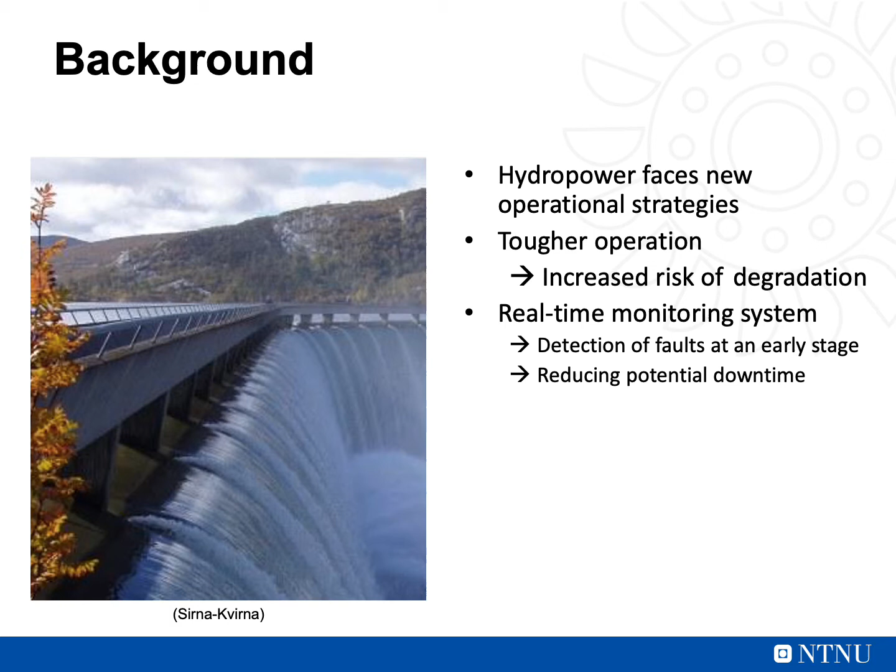In other words, the turbines are forced to handle tougher operation and prone to more frequent degradation and damages. At the same time, there is an increased focus in the hydropower industry on developing models for fault detection and condition prediction. By implementing real-time monitoring systems including such models, a better understanding of degradation may contribute to detect faults at an early stage and reducing potential downtime.

I will introduce you to the main parts of my project thesis. First, I will give a brief review of methods used for fault detection in the hydropower industry to provide insight into state-of-the-art. Further, relevant theory and methods necessary to identify the normal behavior of a turbine will be presented. Steady-state measurements of pressure pulsations are conducted on the Francis model test rig in the Waterpower Laboratory. Peak-to-peak values and frequencies from the measurements are analyzed and related to various hydraulic phenomena, and possible fault detection schemes are suggested. And finally, I will talk a little bit about further work.

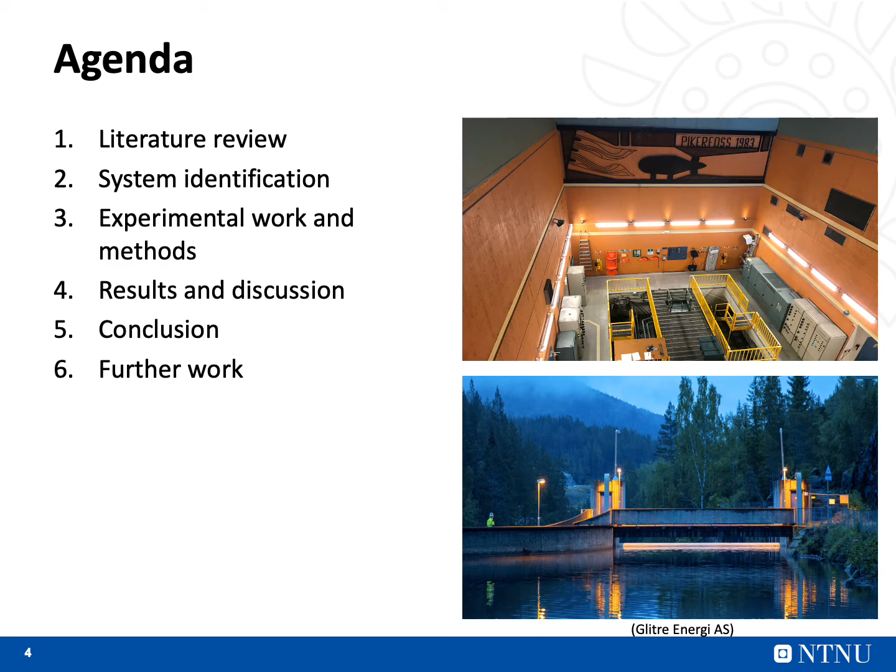I will not go into details from the literature review, but present some key findings that have helped form my project work during the autumn. When developing models used for fault detection, sufficient data from both normal and faulty states are essential. Hydropower components are characterized by unique designs, high reliability, and long lifetime, which results in a lack of historical fault data, so learning from faults is not feasible.

Findings from the literature show that this limitation is usually dealt with by building models based on the normal behavior of the system. Normal behavior models aim to learn the typical relations and patterns for the operation of the system without symptoms of failure. In this way, the real measured value from a sensor can be compared with the estimated value from the normal model, and a deviation will indicate an abnormal situation that should be further investigated. Such models can be divided into different categories, often classified as either physical or data-driven models.

Physical models depend on the knowledge about the process and the underlying physical phenomena that result in faults. They may be beneficial when detecting specific local faults in the system or at component level, such as detection of different cavitation processes on the runner blade. A study done by Xavier Escaler, a researcher from Spain, shows how to detect 4 cavitation processes on a Francis turbine. By first identifying the frequency signatures of each process from vibration and pressure analysis, he demonstrates how the amplitude of each frequency changes when provoking the different cavitation types. The result can be seen from the figure.

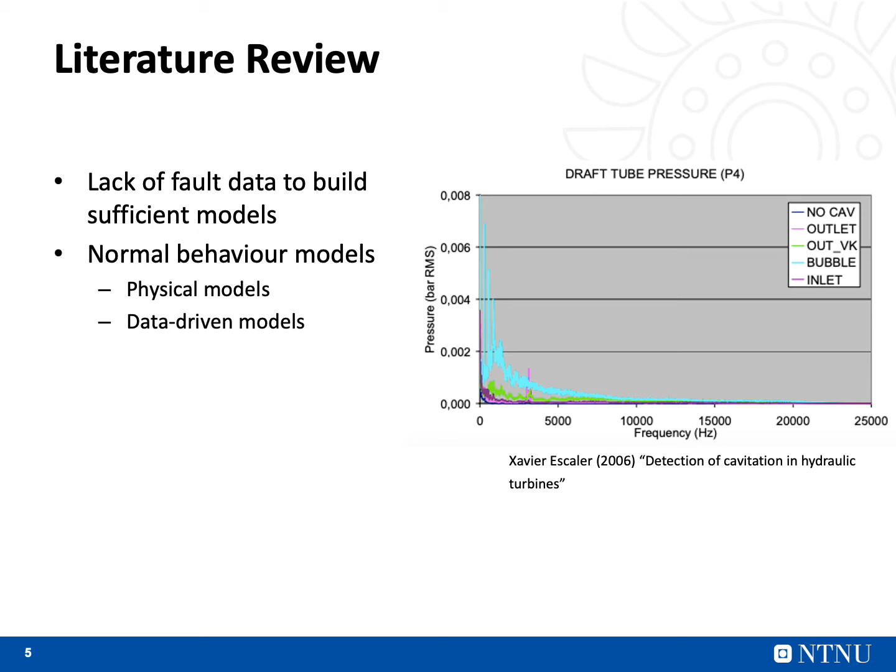Data-driven models, on the other hand, aim to find patterns in large datasets to identify unexpected trends and deviations. And due to the complex structure of a hydropower system with interacting components regarding mechanical, hydraulic and electrical equipment, the mapping between the different parameters may be challenging to describe with a physical model. Data-driven approaches allow for discovering non-linear dependencies in extensive datasets based on machine learning algorithms. These methods are not widespread in the hydropower industry today, but several attempts using artificial neural networks and support vector machines have shown successful results.

So, when building a normal behavior model, it is necessary to identify the system and the typical failure modes, which is necessary for finding out how these can be detected. Even though hydraulic turbines are reliable, they are subjected to some modes of failure.

According to the handbooks of EBL, standards used by Norwegian hydropower companies, the types of failure that occur on the runner blade can mainly be divided into crack propagation and regular wear. These damages are caused by material defects and fatigue, in addition to cavitation problems and sand erosion. And they are essentially a consequence of vibration due to pressure pulsations and hydraulic instabilities in the water flow.

These failure modes may not directly lead to breakdown. However, they may cause harmful and unstable operation, and if a turbine continues to operate under these conditions, the lifetime will be significantly reduced. Turbines are designed to operate at one operational point called the best efficiency point. The appearance and intensities of the phenomena tend to increase when running outside this desired point.

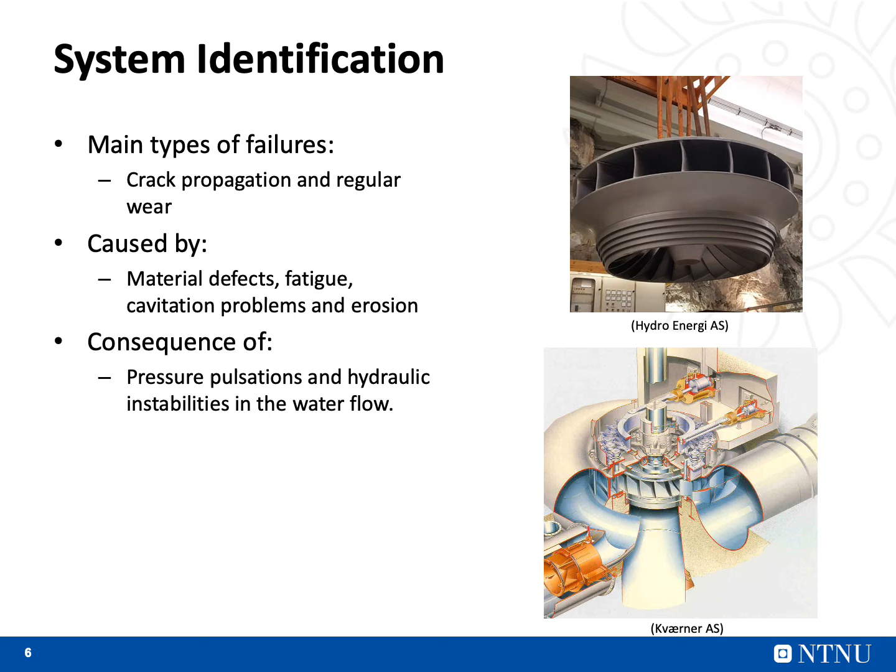So our first step is to identify the primary sources causing pressure pulsations. Pressure pulsations are flow phenomena that occur inside the turbine and can either be of stochastic or deterministic nature. A common source for deterministic pressure pulsations are the rotor-stator interaction and the part-load vortex rope in the draft tube.

The RSI refers to pulsations that occur as a result of the interaction between the rotational runner and the stationary part, as seen from the upper picture on the screen. The frequency of this pulsation will depend on the rotational frequency and the reference system, and seen from the guide vane, the frequency experienced each time the runner blade passes is called the blade passing frequency and can be found by multiplying the number of runner blades with the runner frequency.

Yes, and when a turbine operates outside its design point, a swirling component will occur in the draft tube. At part load, the swirling component will move in the same direction as the runner, and the rotating vortex rope can be observed, which you can see to the right on the lower picture. And this rotating rope will induce pulsations in the range of 1/3 of the runner rotating frequency.

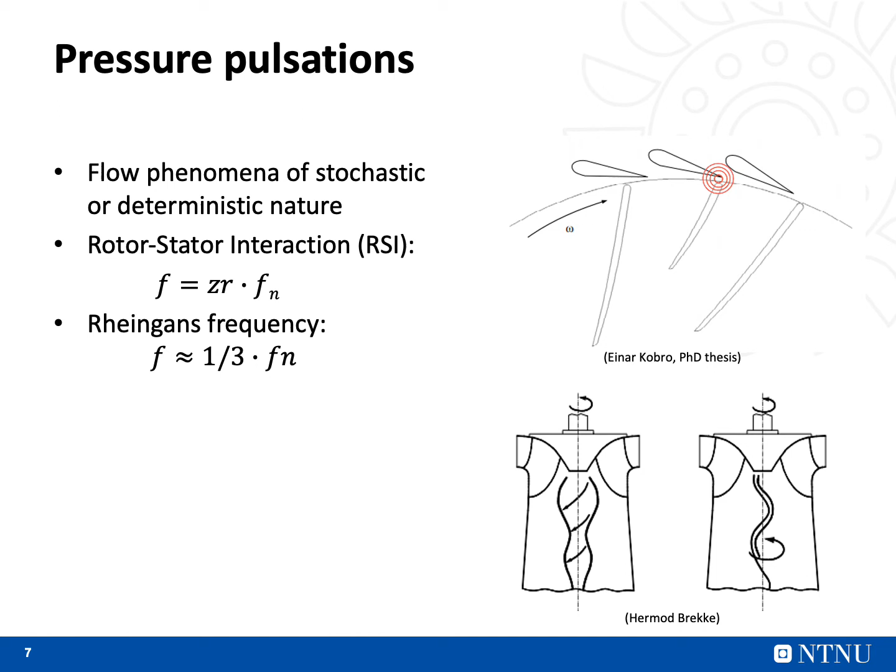So, the measurements in this project were conducted on the Francis Model Test Rig, located at the Water Power Laboratory at NTNU. Measurements were done for the open loop configuration at a constant head of about 12 meters. The figure shows an illustration of the open loop circuit. The water is pumped from the lower reservoir in the basement to the upper reservoir in the attic. And from there, the water flows through a high-pressure tank, through the turbine, the draft tube, and the draft tube tank into the lower reservoir again.

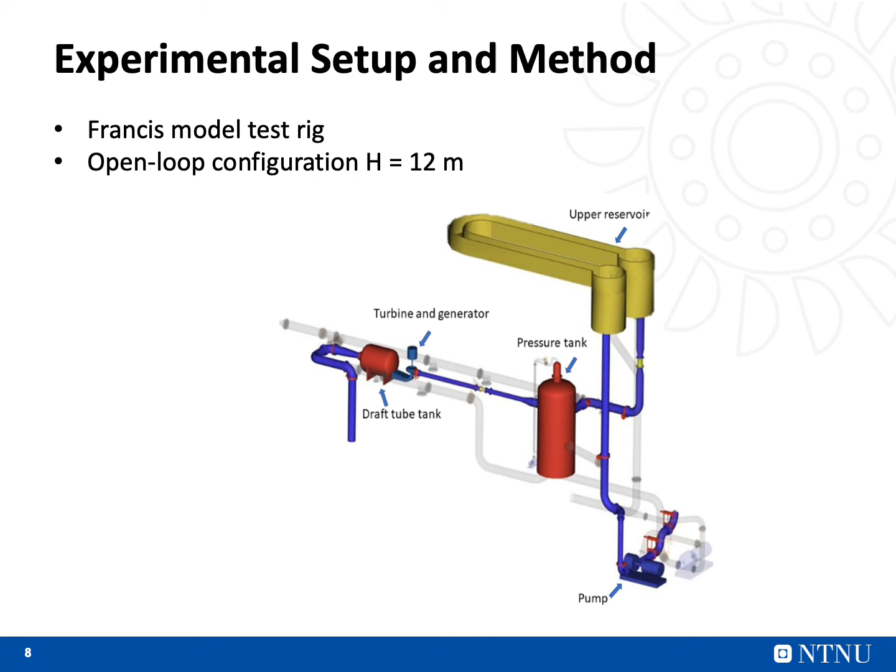And during the measurements, the pump turbine runner was installed, which consists of 6 runner blades, and the number of guide vanes is 28, and the spiral casing consists of 10 stay vanes. The pressure pulsations were measured by 3 pressure sensors. One was mounted at the inlet before the spiral casing, and 2 on the upper draft tube cone, 180 degrees from each other, as you can see from the figure.

The sampling frequency was set to 5,000 Hz to ensure reconstruction of all frequencies from the analog signal, and the recording time was 120 seconds. Steady-state measurements were carried out for guide vane openings from 4 degrees to 14 degrees at constant rotational speed. The speed was set according to the one obtained at BEP, the best efficiency point, to give a realistic picture of the actual working range for a full-scale turbine.

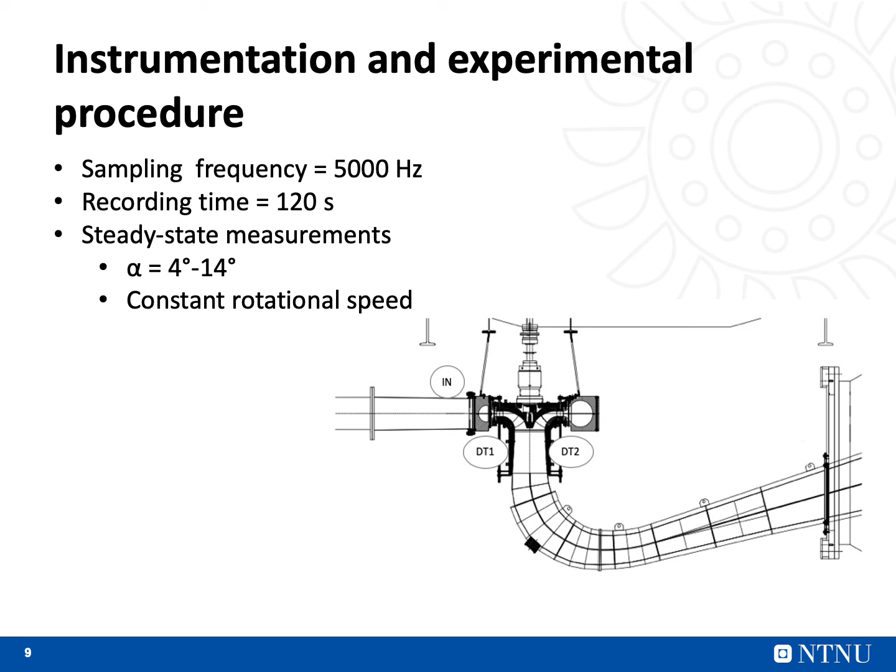As the system degrades, characteristics of the signal in time and frequency domain may change. MATLAB has been used for analyzing the measured data. Peak-to-peak values are calculated for each guide vane opening with the histogram method containing 97% of the sample signals. The peak-to-peak values give an impression of the intensities of the pulsation, but independent of the frequencies. So, to investigate the origin of these, the signals were decomposed.

A spectral analysis of the acquired pressure values was conducted using the Welch power method. The method returns the estimated power spectrum by dividing the sampled data into overlapping segments. Each block is then multiplied with a suitable window to remove discontinuity in the signal before the fast Fourier transform is applied. And finally, the resulting periodograms are averaged over all windows to reduce the variance. The spectral analysis was performed in MATLAB with a Hann window and 50% overlap, and 8 windows.

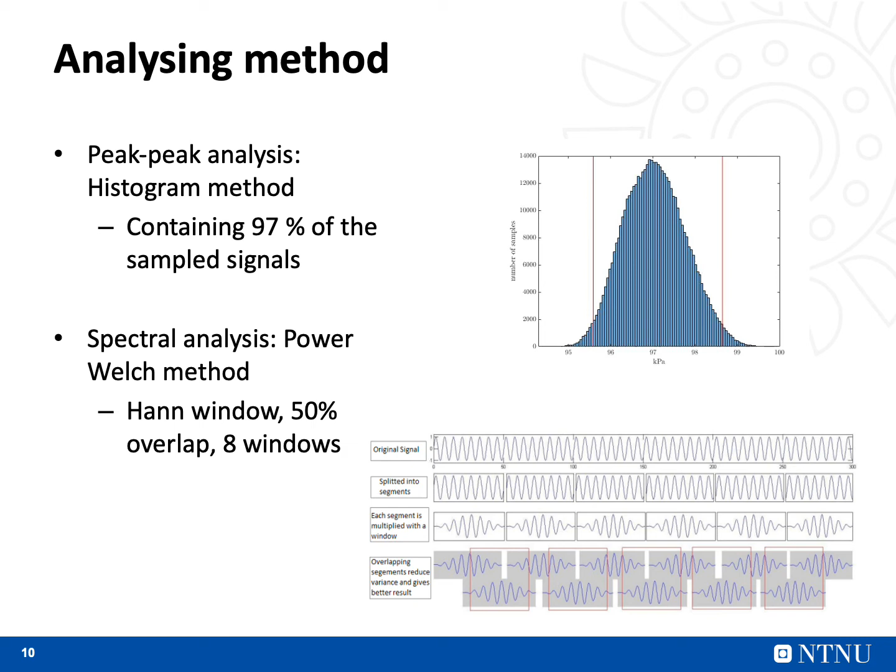So to the results and a discussion of these. The figure to the left shows how the relative peak-to-peak value varies with different guide vane angles for the 3 sensors. The pulsations have highest intensities at low and high loads away from BEP. Here the flow entering the draft tube is characterized by irregularities and swirling components, inducing pulsations with high amplitudes.

In addition, the peak-to-peak values for the inlet sensor increase from BEP towards overload, which can be explained by a smaller volume in the vaneless space, causing more pronounced pulsations with higher amplitudes. When a runner is damaged either through erosion or cracks, this will affect the water downstream the turbine and may increase the intensity of the pulsations in the draft tube.

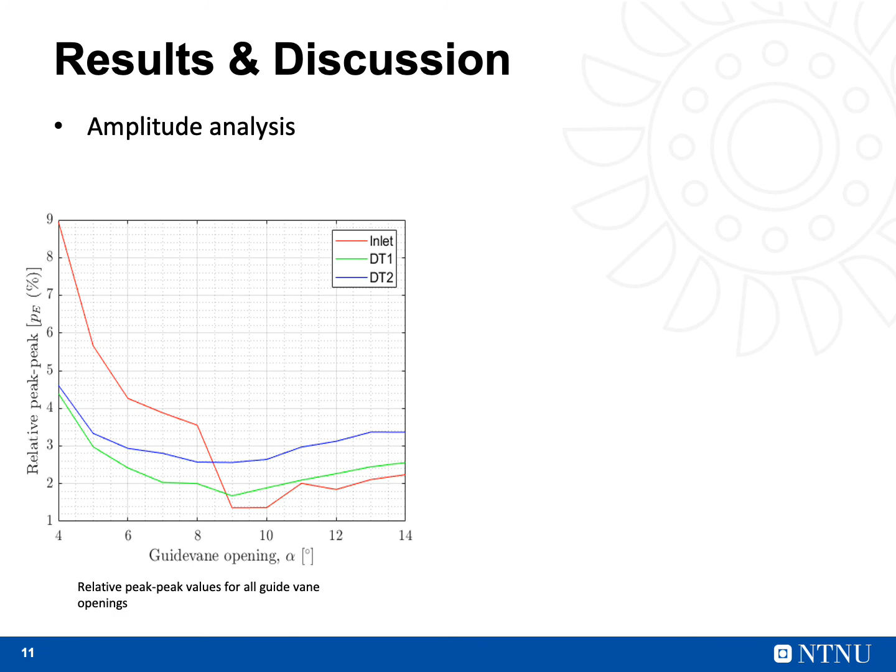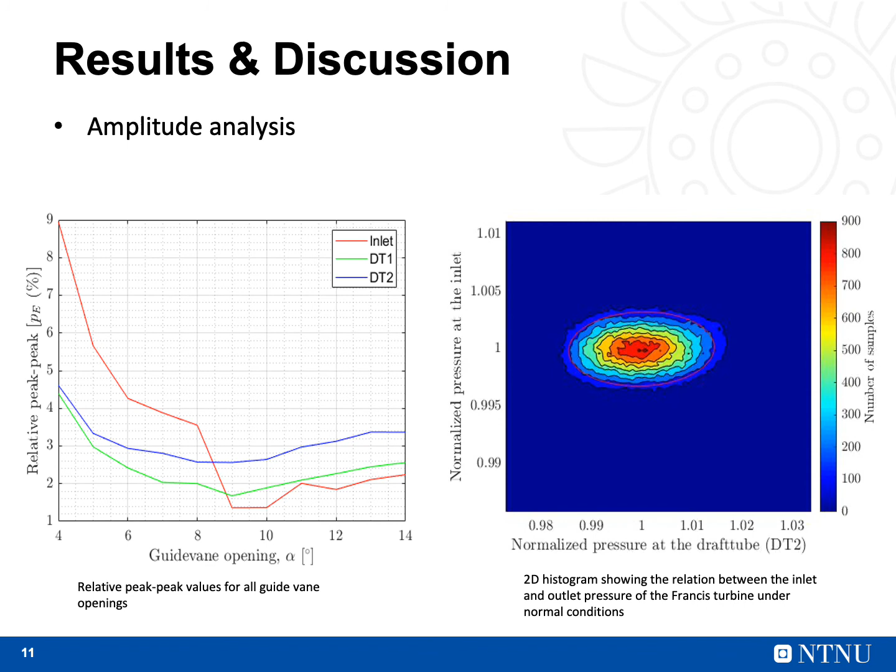And this figure provides another way to detect local faults, which can be to monitor the pressure relation between the inlet and outlet. Fault modes appearing on the runner blade will change this relation and induce corresponding mismatches, and the red circle on the contour plot may demonstrate an alarm bound of which deviations from normal behavior can be detected. And further, this can be expanded to include more sensors and all operational points, and maybe with advanced machine learning algorithms mismatches may be detected more immediately.

Frequency analysis was performed to investigate which hydraulic phenomena occurred for the different operating conditions and which is most dominant. The results from the 3 sensors can be seen in the figures. The frequency plots were analyzed manually, and several of the expected frequencies are identified, where the most prominent ones are the blade passing frequency, seen as 6 times the rotational frequency, and the Rheingans frequency, at around 0.27 times the rotational frequency. In addition, several unexpected frequencies appear from the result, and possible sources of these are system frequencies and external influencing elements, which can distort the signal.

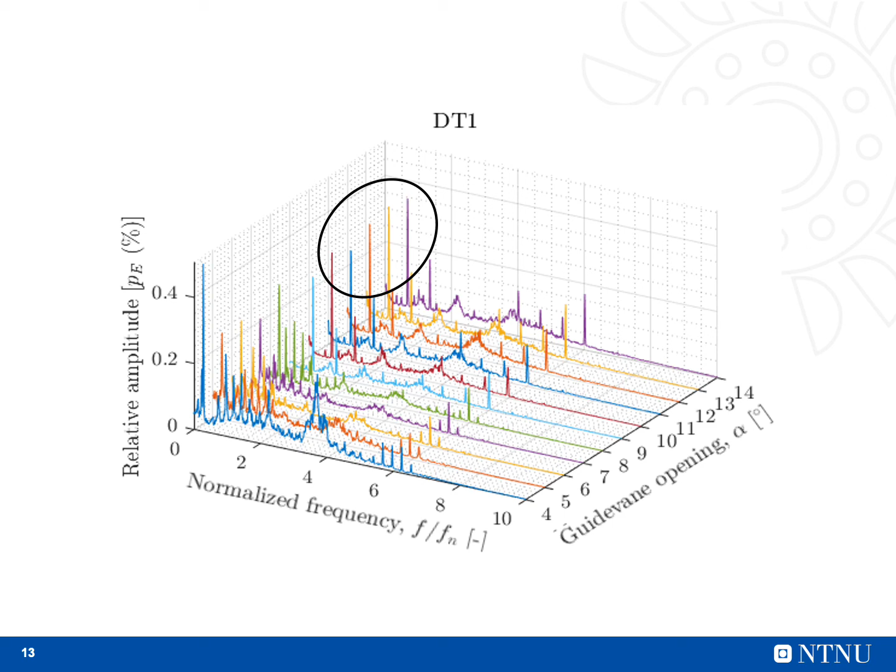And the most dominant one appears at a frequency of 0.67 and is observed at overload in the draft tube. There was no clear source of this frequency, but to further investigate the sources of both this and the others, additional measurements at different rotational speeds would be beneficial in order to divide the rotational speed dependent frequencies from the independent ones.

And by continuously monitoring the intensities of occurring frequencies, alarms should be raised if amplitudes increase or new harmonics appear that deviate from the normal characterizations. For example, in case of cracks on parts of the runner blade or detached parts, this will induce vorticities and pulsations in the waterway, rotating with the same frequency as the runner. As a result, the amplitude of the runner frequency may increase.

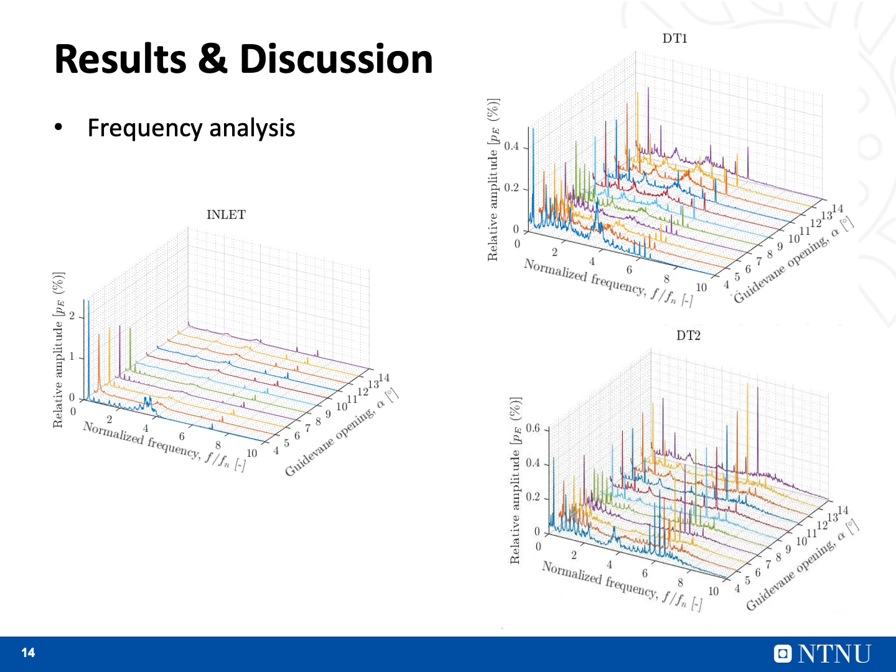Okay, so to identify the normal behavior of the turbine, the main focus of this project has been to detect different hydraulic phenomena occurring over the operating range. And from the normal classification, alarms should be raised in case of mismatches in sensor relations, changes in the magnitude of expected frequencies, or if new harmonics or unexpected frequencies that deviate from the normal condition arise. But due to a lack of sensors and low accuracy in the conducted measurements, the results from this project should be treated with caution due to considerable uncertainties.

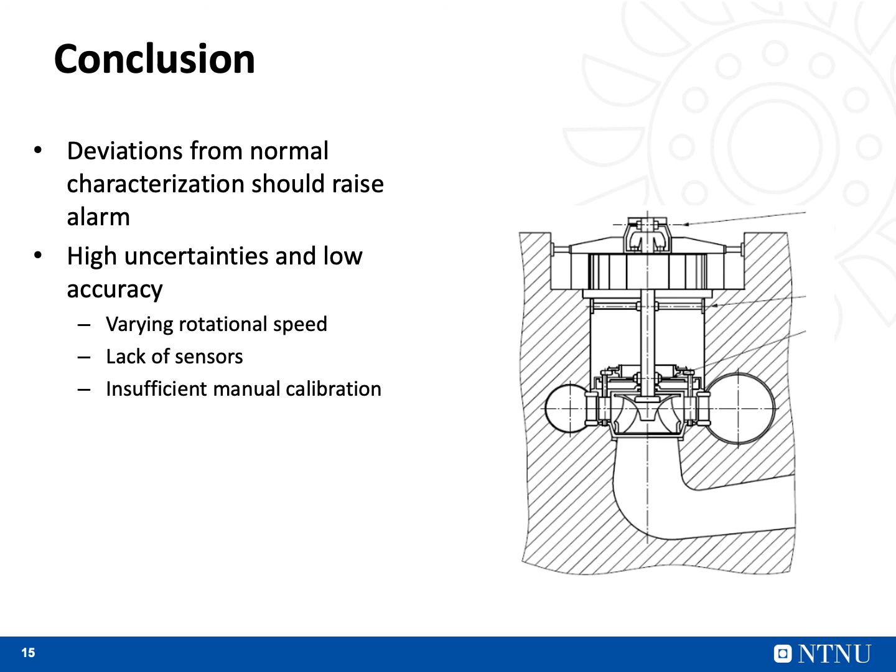The analysis revealed several suspicious observations that have limited the accuracy of a complete normal identification. I will not go through them all here due to the time limitations, but situations that may have affected the results are the varying rotational speed during measurements, a lack of sensors on adequate positions, and an insufficient manual calibration. Thus, careful planning of the number, type, and locations of sensors is crucial. And as the main goal of the preliminary work was to learn how to operate the laboratory rig and how to perform measurements, accuracy was not the main priority, but these experiences have given valuable knowledge for the master thesis.

The main focus of this work has been to identify the condition of the turbine without symptoms of failure. And the new variable speed optimized runner designed by PhD Igor Iliev allows for changeable runner blades. So by 3D printing blades, one can simulate various types of faults, such as cracks or erosion. And the master's thesis will investigate how to identify such errors with extended measurements and comparative analysis.

In addition, the focus when discussing fault modes has been locally on the runner. This is a narrow scope as other components will naturally affect the unit. Therefore, for further work, it would be interesting to consider the influence of other parts and components as well, such as an asymmetric rotation due to faults in bearings or speed variation due to frequency variation in the grid.